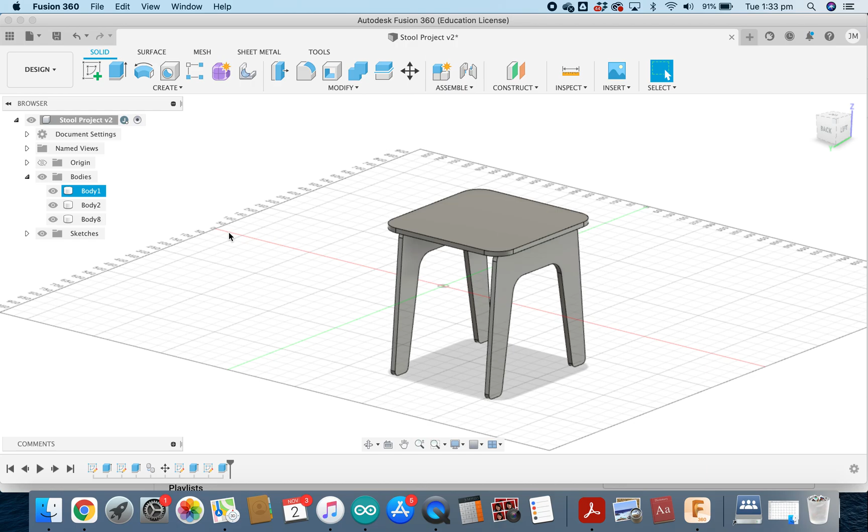Next thing we want to do is create a sketch. So selecting the sketch tool, we're going to zoom in here, and we're going to create a sketch on this chair leg.

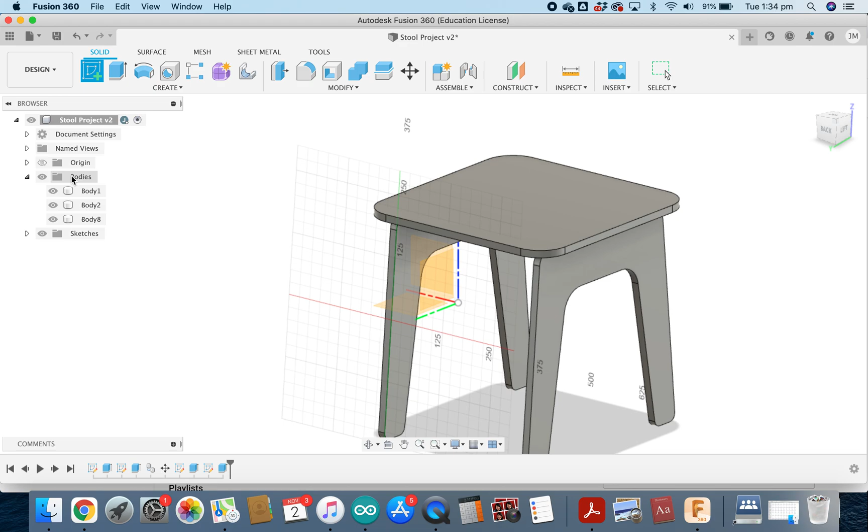Okay, and I can see as I hover over that chair leg that it is body 1. If I hover over the top, it is body 8, and this side will be body 2. What I'm going to do is turn the other two bodies off so that I only have the first chair leg showing, and then I'm going to create a sketch on this surface.

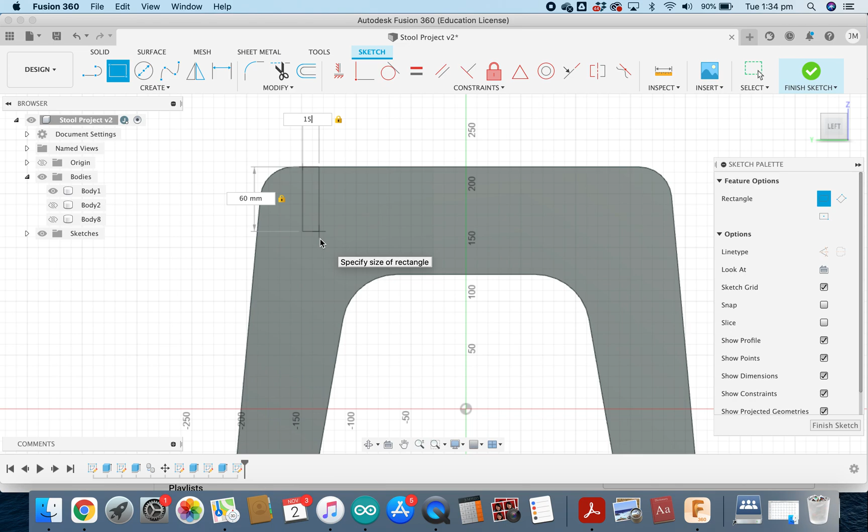What we wish to do this time is create a rectangle, and we're going to create a 2-point rectangle. It doesn't really matter where we place our corners, but as long as we come down from the top, we're going to make it 60 millimeters in length. Hitting tab will jump me to the next field, and 15 millimeters in width, because we're using 15 millimeter material.

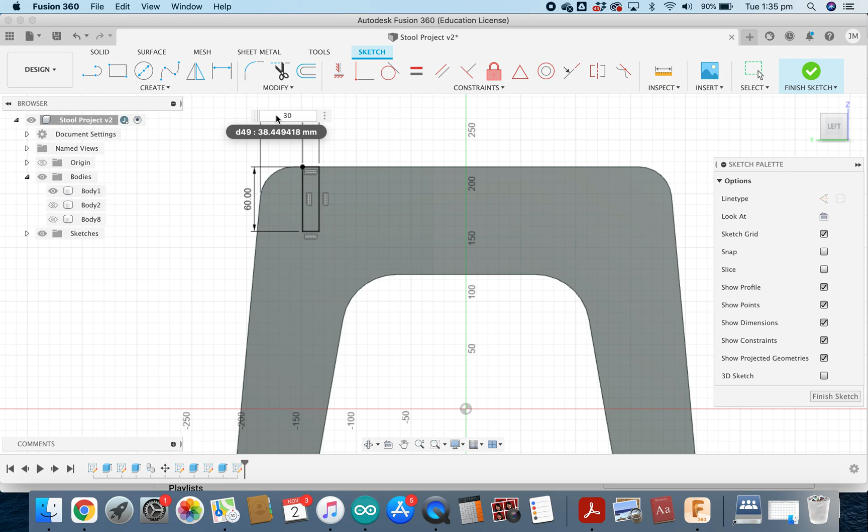Hitting enter, you can see that I have placed it, but two of my lines here are blue. So I'm going to press D for dimension, and I'm going to dimension this line here off this point on the edge of where I start to curve in, and dimension that at 30 millimeters. What that should do is move it across, and it should make all the lines on my rectangle go black. I need to do the same on the opposite side of my chair.

So we're going to create a rectangle, just draw it anywhere to begin with and make it 60, tab, 15, pressing enter, and then I need to hit D for dimension this line off this point here on the side of my chair and make it 30. Enter. So now I've got these two rectangular sketches drawn on the inside of my chair leg that are dimensioned and in the correct spots.

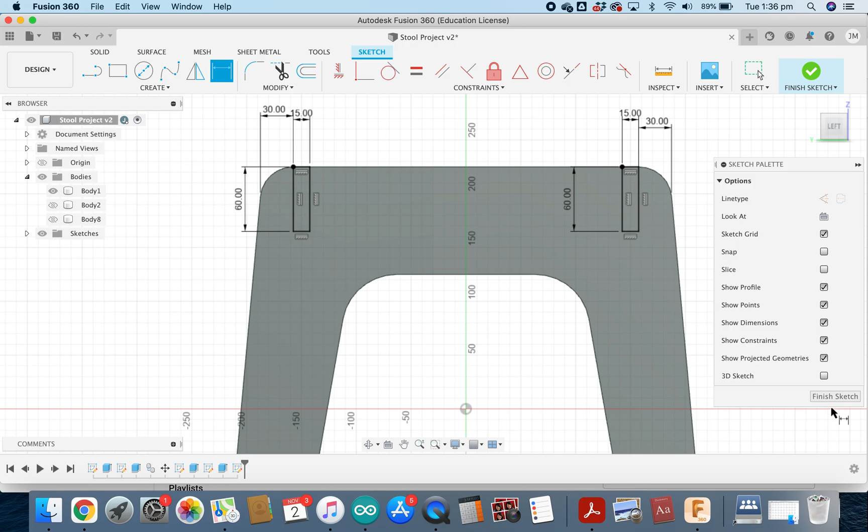Okay, let's finish that sketch and click on the home button to get a three-dimensional view of it. I might just spin around so I'm looking at the inside of my chair.

And what I'm going to do now is hit E for extrude, which is this tool up here in the top left hand corner, and it brings up this extrude panel. If for some reason your extrude panel is closed, you just need to open it up. Let's try that again.

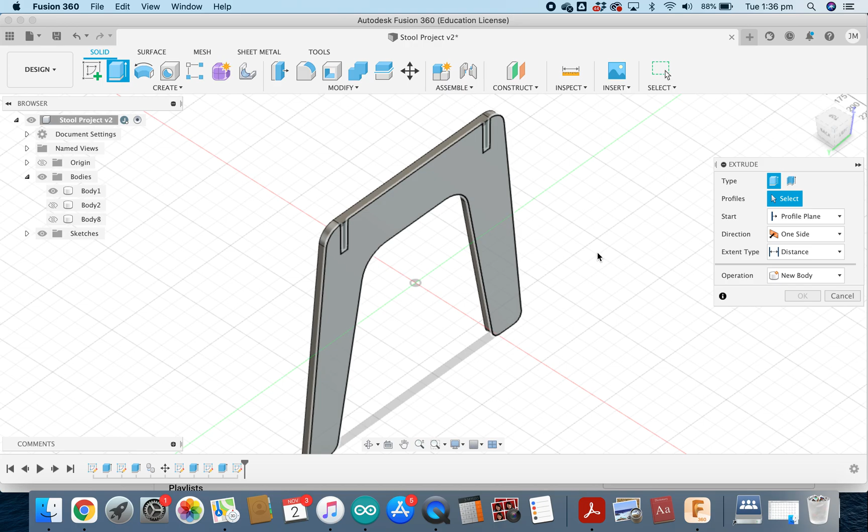Profiles - I need to select what I wish to extrude, so I'm going to select these 2 points. What I'm going to do now is start to initially drag those points out. The challenge with this is we do not know how far we want to drag these two rails out on our project.

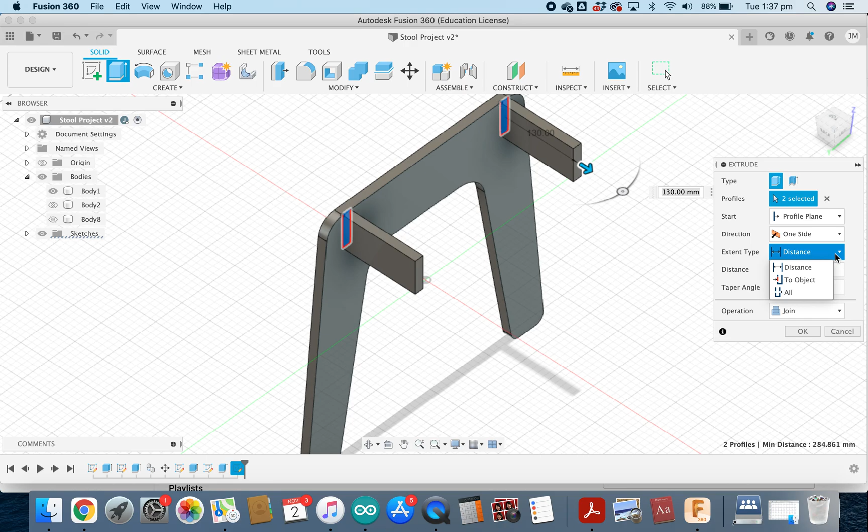So what we're going to do is use this drop down arrow, and what we want is to extrude them to an object. The object we want to extrude them to is body 2. And if we turn body 2 on, we want to extrude them to body 2. We don't want them to be joined, we want them to be new bodies. So we're just going to change that operation down there to a new body.

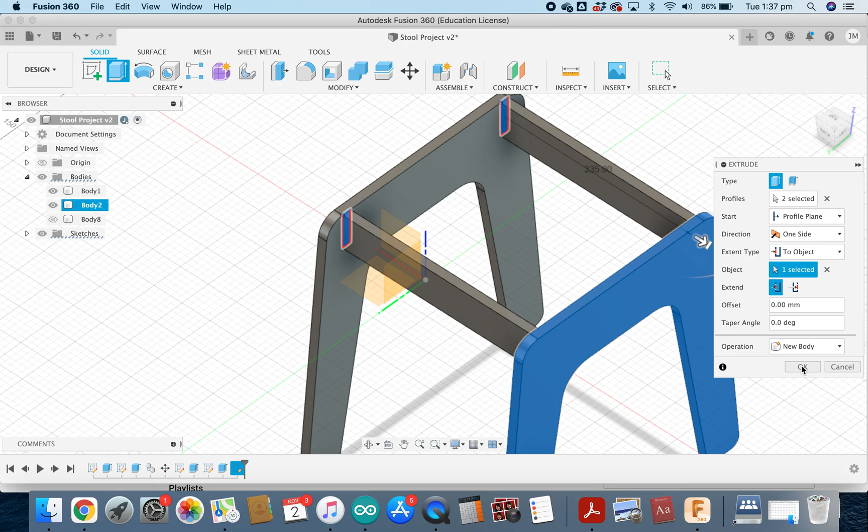Clicking OK, you can see it will add another 2 bodies to our bodies over here on the side, and we've got our rails running through our project. Turning on our top, you can see now we start to have our stool and seat coming together quite nicely.